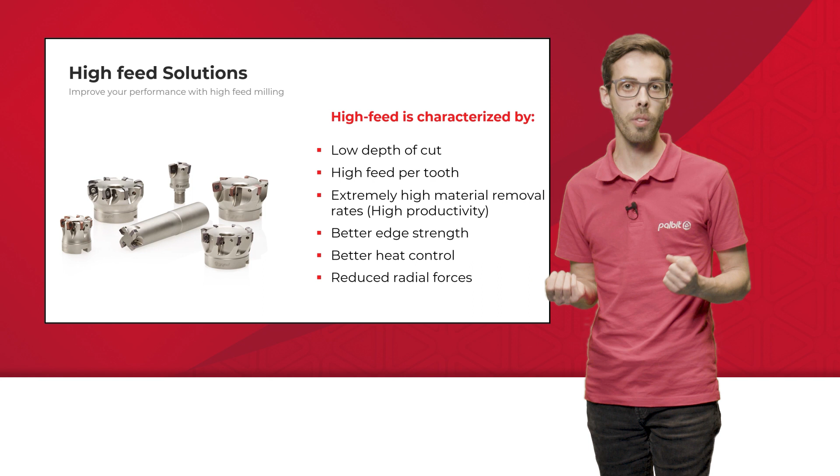High-feed milling is commonly seen in roughing operations where it can provide maximum productivity. In summary, these strategies combine a shallow depth of cut with an appropriate small entering angle, allowing a considerable increase in feed per tooth, also having as advantage a more resistant cutting edge, better temperature control, and reduction of radial forces. This strategy can be seen across a wide range of materials, especially difficult to cut materials.

Depending on the material, we must choose the most suitable chip breaker to produce the most desirable chip and extend tool life. Palbit offers a specially designed chip breaker for each material class.

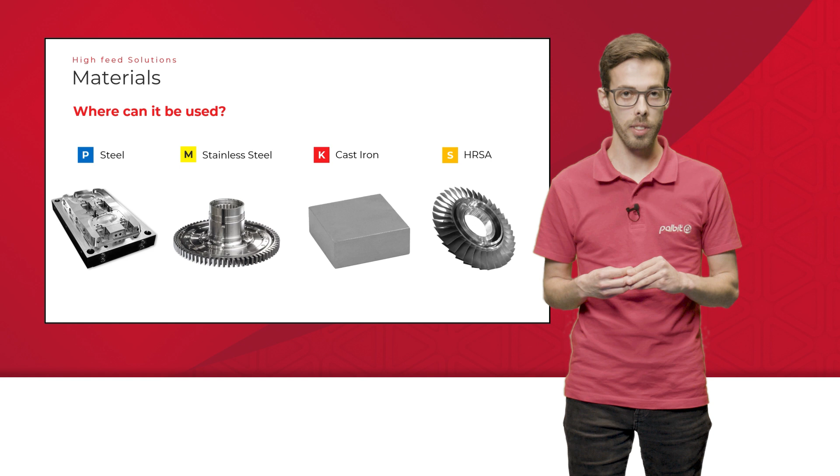Now I present to you our line of solutions for high-feed milling. We currently have 4 lines of milling cutters for high-feed milling. One of each is solid carbide. These lines are offered in Weldon, cylindrical, threaded, and arbor configurations.

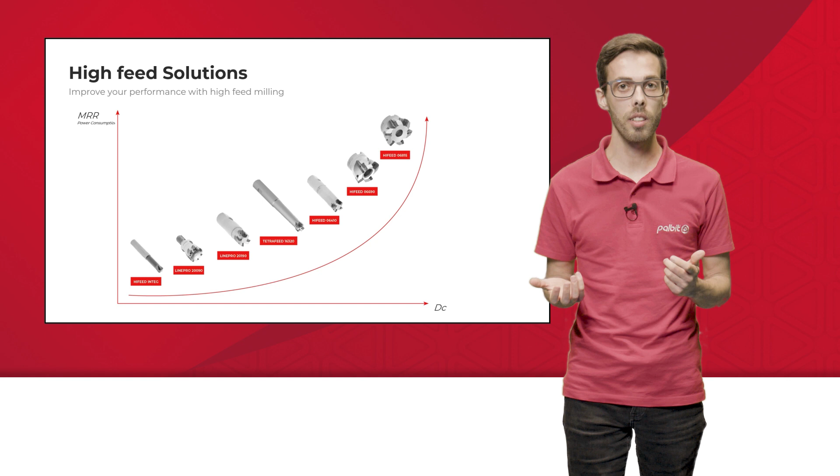In the presented graph, you can see a distribution of our product range based on material removal rate as a function of cutting diameter. Our LinePro is ideal for anyone looking for a versatile solution, especially small and medium-sized manufacturers, who, with a single product line, can carry out shoulder and high-feed milling operations, with special emphasis on our Tetra Feed line, which for identical cutting diameters of the line high-feed allows for a greater number of teeth.

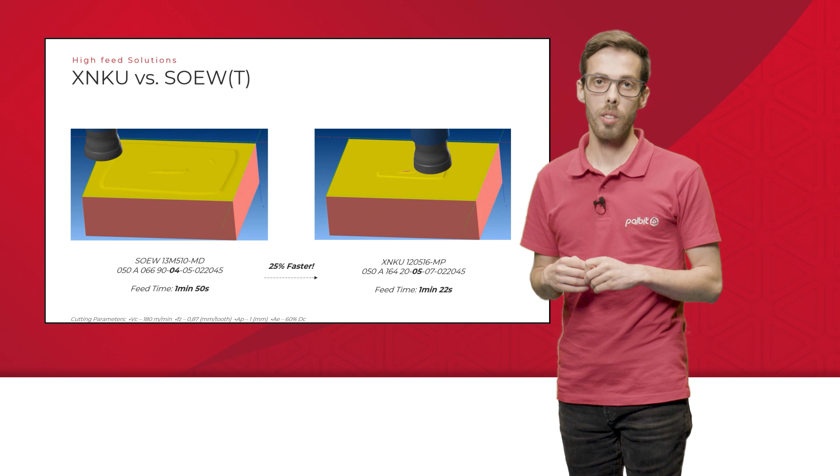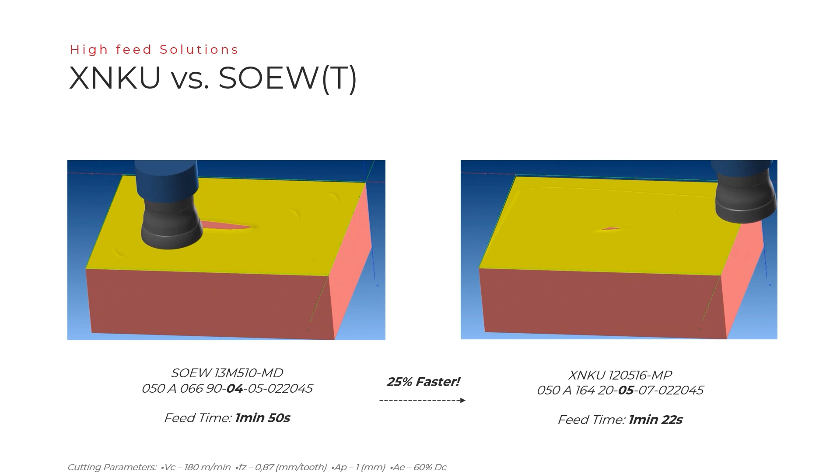As you can see, for the presented cutters, the addition of one more tooth allows us to increase our productivity by 25%. However, the negative geometry of Tetra Feed inserts requires higher power consumption. On the other hand, the positive ground geometry of SOEW and SOET inserts guarantees a superior run-out, which translates into a more stable cut with less vibration and cutting forces, while allowing us to offer a wider range of diameters.

Next, I present to you my colleague Nuno Leitão.

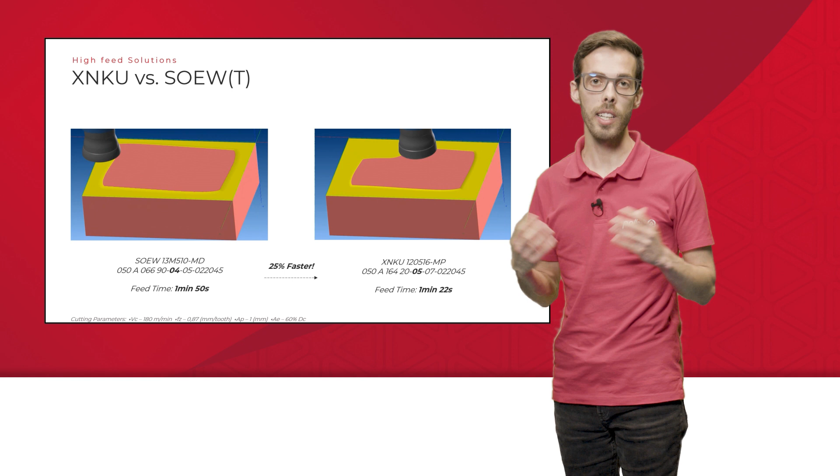Hello everyone and welcome to our webinar on high-feed milling. My name is Nuno Leitão and I'm Palbit Area Manager responsible for Italy, East Asia and Southeast Asia. My path in Palbit allowed me to contact with different markets with completely different levels of maturity, which also gave me the opportunity to see the same type of components being machined with completely different milling approaches.

Our technical team gave us a wonderful introduction about Palbit high-feed milling tools. And to complement it, I'd like to emphasize that high-feed milling is the milling concept that characterizes mature markets with good technological knowledge and qualified technicians.

However, competition is out there, and as a complete tooling provider, Palbit team challenged itself to develop a wide range of solutions capable to compete on all kinds of markets, from exotic materials to mold steel and cast irons, from the high technical requirements of aerospace industry, where even the temperature of the workpiece must be taken into consideration, to a simple pocket on a mold steel.

From high-feed special solutions to multi-application solutions provided with our lines 200, 201 and 202/90. Speaking a little bit about the market. According to the latest published data, as previously introduced, the worldwide milling market size is estimated to be over 8 billion United States dollars. From those 8 billion, about 21% are estimated to be related to high-feed milling tools. We are speaking about a market size of $1.7 billion, only for high-feed milling.

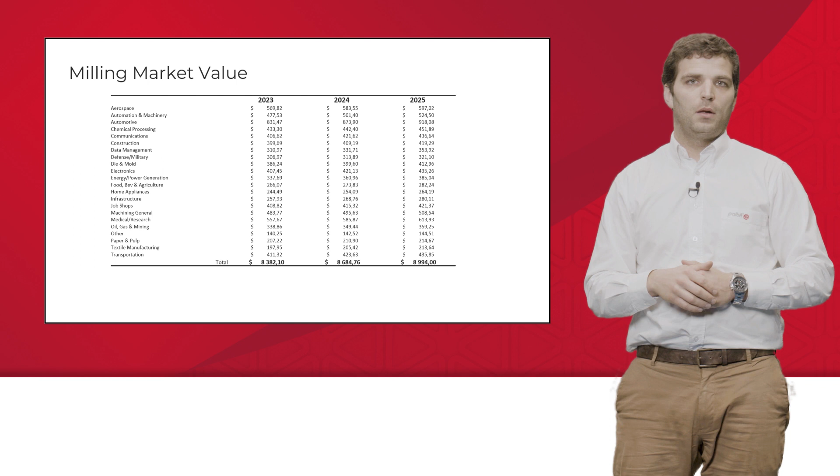We will proceed this journey taking an overview over our solutions, so that when we are in front of our end users, we clearly know the solution that better suits their needs. We will also have the opportunity to check some test reports where we can compare Palbit solutions versus our competitors. We will start with XNKU, and Palbit lines 16320 and 16420 are our latest release on high-feed indexable milling, developed with the main purpose of decreasing the tooling costs of our customers.

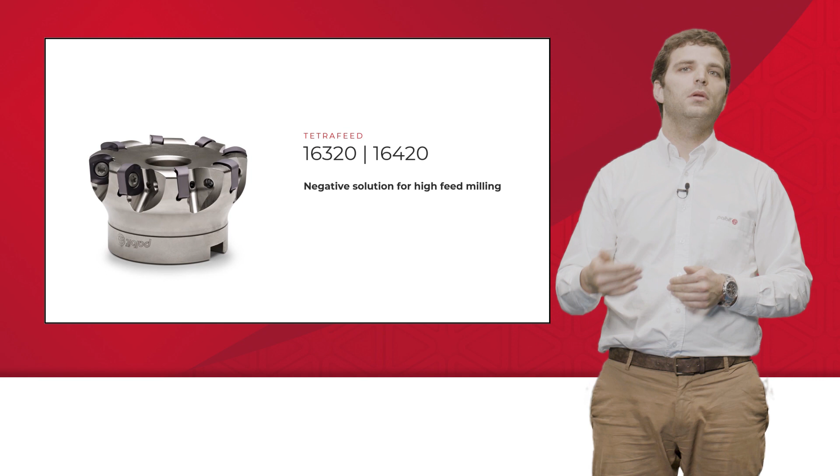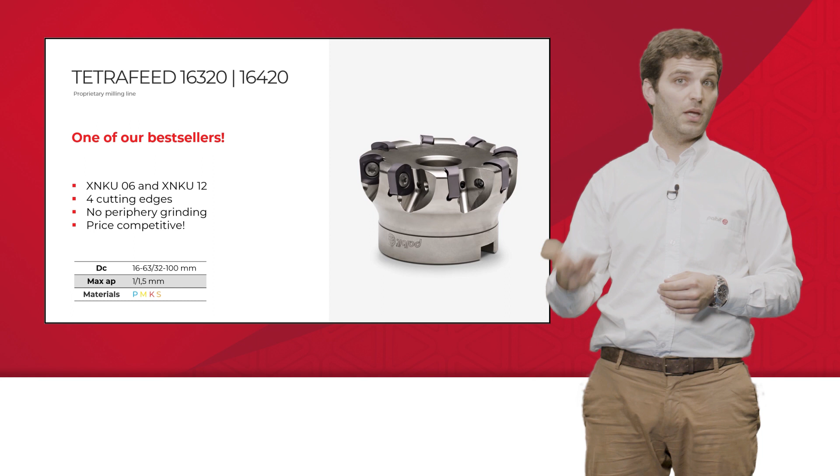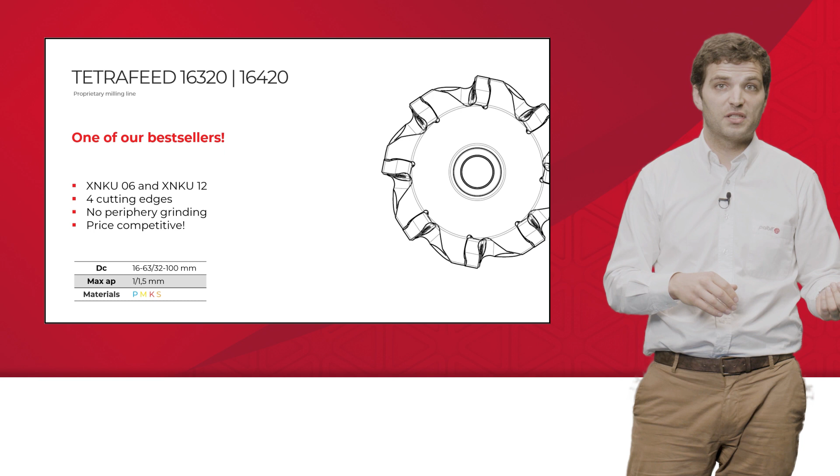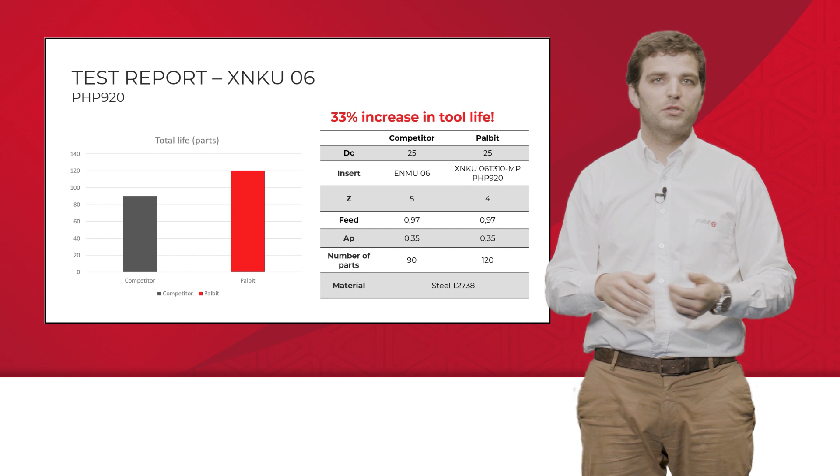XNKU is a robust negative insert, capable to work on a wide range of diameters, and with the main feature of being tangential, which allows a bigger table feed when comparing with a positive solution with the same diameter. Despite being a negative solution, XNKU delivers a smooth cutting due to the positive chip breaker and due to the curved shape of the cutting edge that allows a smooth entering into the workpiece material. XNKU does not require grinding on the periphery of the insert, which, despite the bigger radial runout, has the advantage of being more competitive price-wise. On the following screens, you'll be able to see why XNKU can enhance the cycle time and improve the tool life versus our competitors.

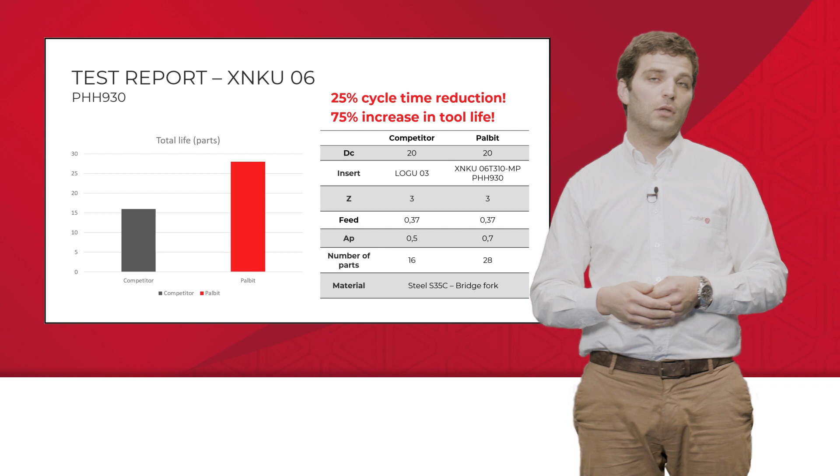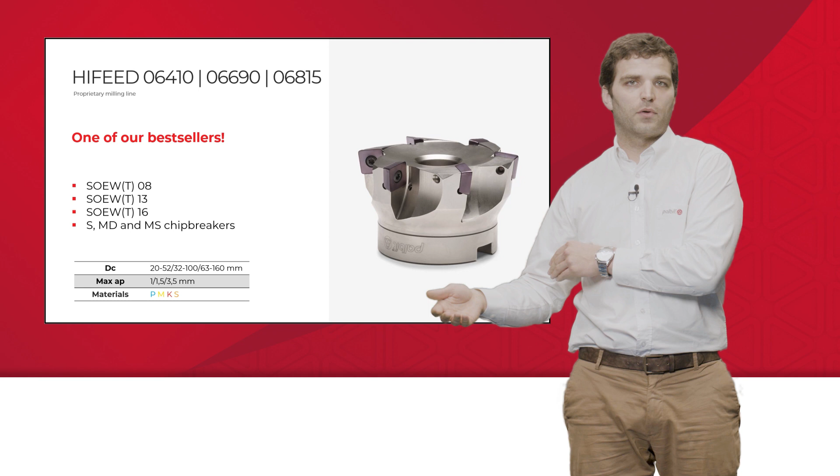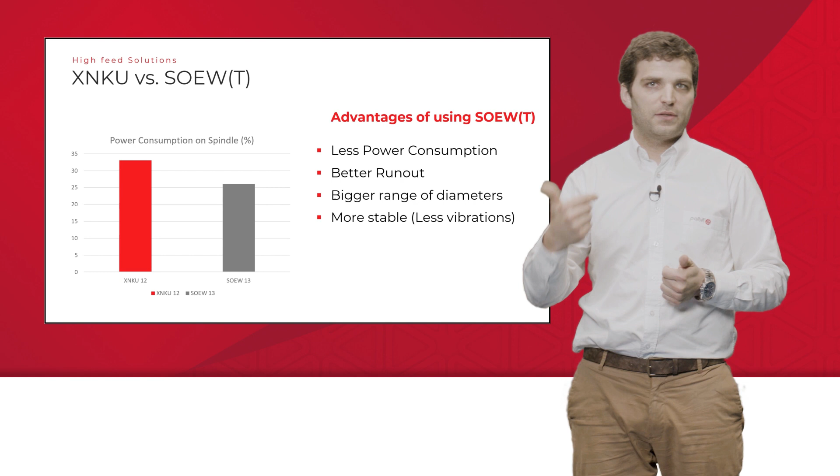The lines 064, 066, and 068 are lines with lower entering angles than 163 and 164. This feature, together with the fact of SOEW and SOET being positive inserts, completely ground, allows higher feed per tooth than XNKU, which can be beneficial in some applications. When speaking about SOET's MS chip breaker, together with our PHH 930, this is our first choice for heat-resistant superalloys and stainless steels milling with high-feed concepts. On the following screens, you'll be able to see how SOEW or SOET outperforms our competitors.

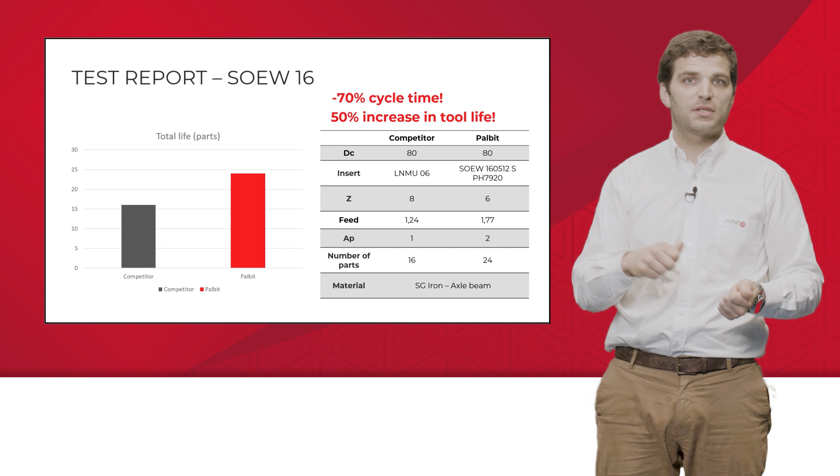Line 20090 and 20190. When our customers are a small workshop, rather than looking for productivity, most of the time our customers are looking for versatile solutions with low tooling costs. But why not offer them a versatile solution that can also be productive? With the lines 20090 and 20190 that are tailored for shoulder milling and finishing, we give our customers the opportunity to assemble on the same milling body shoulder milling inserts, finishing inserts, and high feed milling inserts.

So now that we have gone over all the main high feed milling lines, you should be wondering to yourself, it will be perfect if I can use this kind of machining strategy on small diameters, as I will be saving a lot of time for my customers. However, we are limited to 10 millimeters with the line 20090 with XPET 06, and you are correct when you wonder that. There is a limitation on diameter. However, I have good news. Palbit has a solution for you with our HIFEED-INTEG.

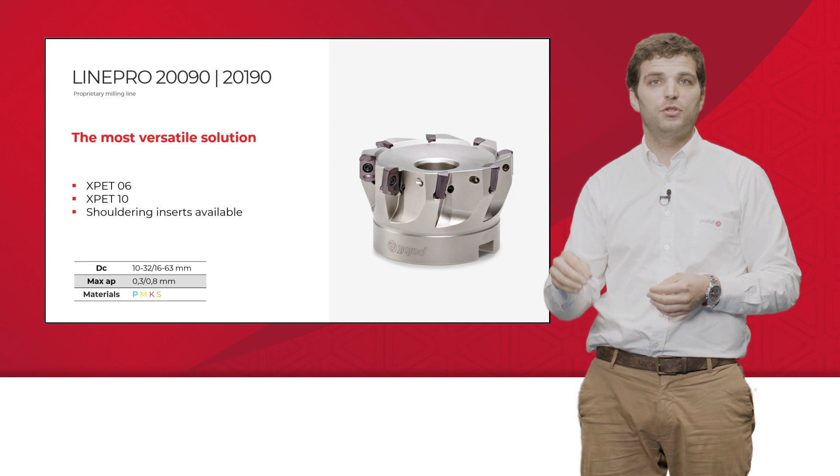With HIFEED-INTEG, we are able to implement all the mentioned benefits of the high feed milling concept on solid carbide end mills. Beginning with 6 millimeters of cutting diameter, produced with a tailored grade, a strong core, reinforced cutting edge, and optimized flute shape to improve the chip evacuation, HIFEED-INTEG allows to achieve a tool life up to 30% higher when compared to a typical solid carbide end mill, even when processing hard materials. We recommend HIFEED-INTEG on small, deep, and shallow workpiece features, on small 3D shapes, roughing, and on small components where plunging is required.

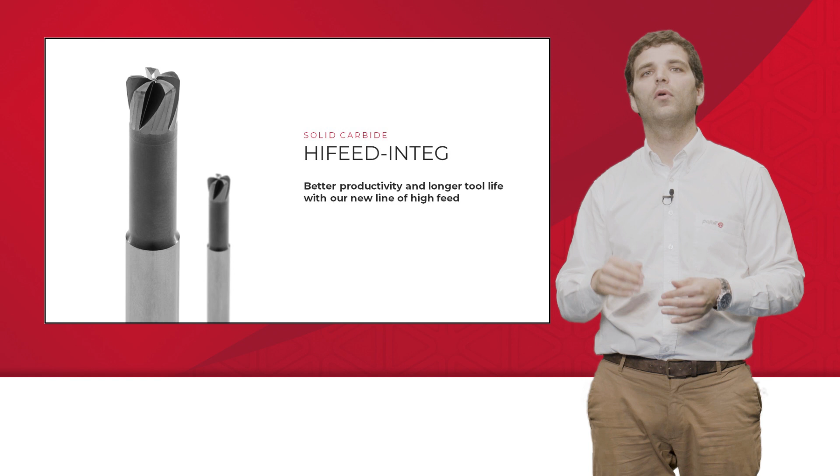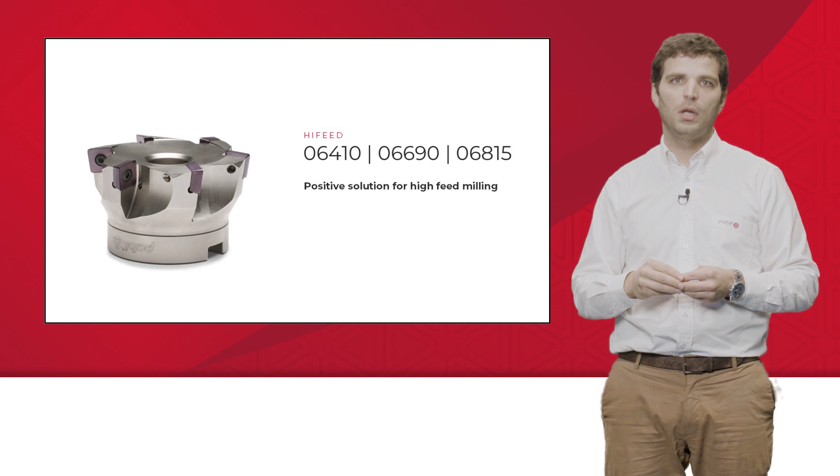Let's now make a summary of everything that we have learned today. The high feed market accounts for over 20% of the milling market size. For small components, we should use HIFEED-INTEG, HXR. When we have strong machines and we look for price-quality ratio, we use XNKU. For high performance, lower cutting forces and better runouts, we use SOEW and SOET. For versatility, we use XPETs.

Wow! Thank you, Nuno and João. Great job! Interesting and insightful as always.

Now, we will explore an industry sector that is becoming more and more relevant due to the rising energy and fuel prices. As a viable alternative to the individual transportation, the railway has historically played a significant role transporting people and goods. It is now gathering attention and investment from decision makers as a sustainable and efficient alternative to cars. Let's explore this sector with the help of Rui Ribeiro. Rui, the stage is yours.

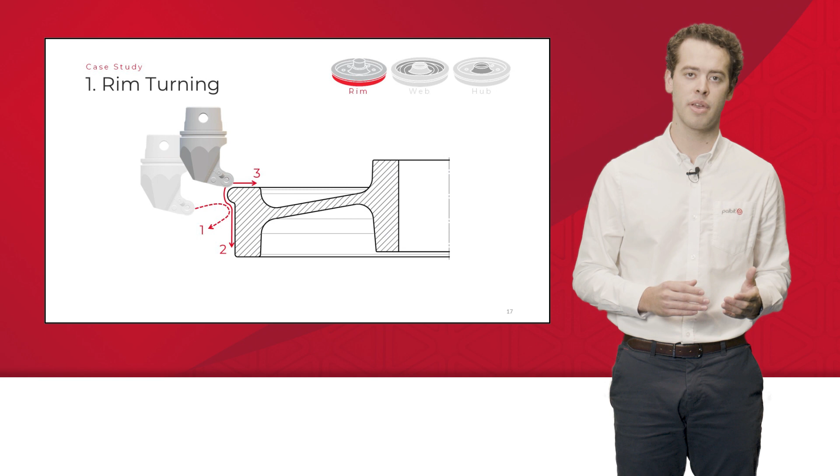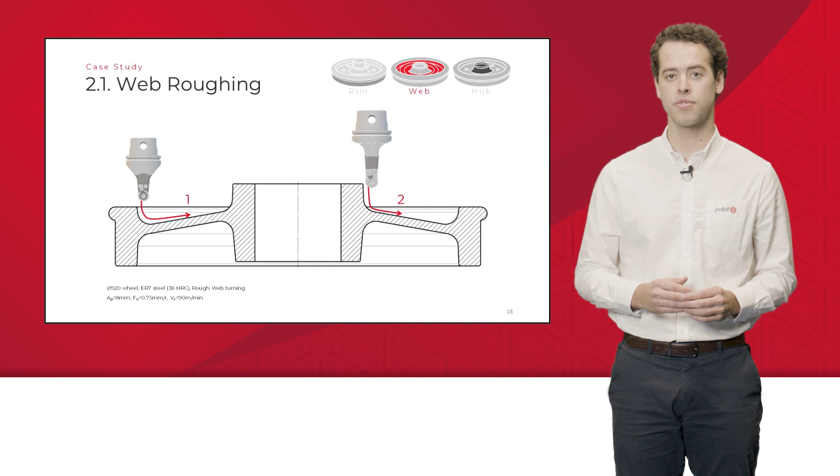The second part is the web. It is the area between our rim and the hub. It is the largest area where the most material is removed. And our main challenge is finding the right compromise between tool life and insert toughness, because our tools need to withstand severe vibrations throughout the process, particularly in problematic areas, including the corner radius between the web and the rim, and the corner radius between the web and the hub. In this spot, our insert will remove the most material with the widest contact surface and withstand the highest loads. Here, we suggest reducing feed rate by 1/3, and often inserts with ISO range P15 to P25 grades are preferred.

Last, we have the hub. It is where the rail axle is installed. Often, it requires multiple passes from roughing to finishing, and the main challenge is the limited cutting speed. This is due to the smaller cutting diameters found, often leading to long chips being formed.

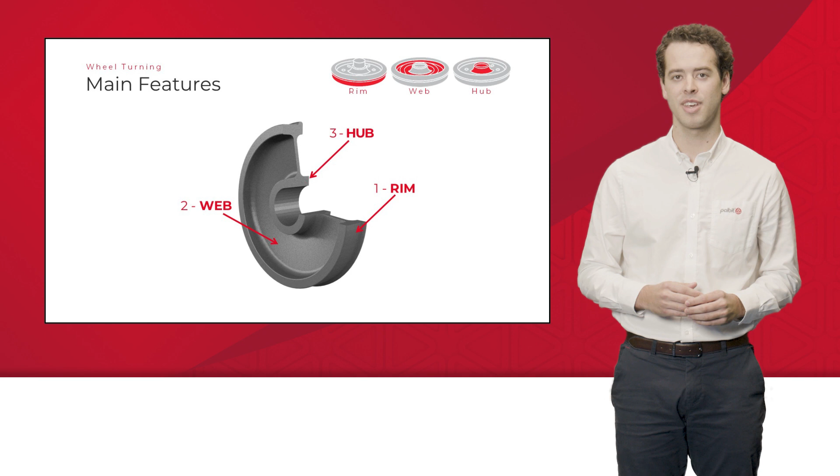For all these operations, Palbit presents itself as the first choice tooling partner for you. For rim and web turning operations, mainly round inserts are used, which you will find available in the Palbit range from size 25 to size 32, in a comprehensive combination of geometries and grades suitable from roughing to heavy roughing operations, from a depth of cut of 3 mm to 18 mm. When it comes to hub turning operations, not only round inserts are applied in OD turning and face turning, but also square shape and C-shape inserts are applied, particularly on internal diameter turning. Again, Palbit offers a wide variety of solutions covering wheel manufacturers' needs.

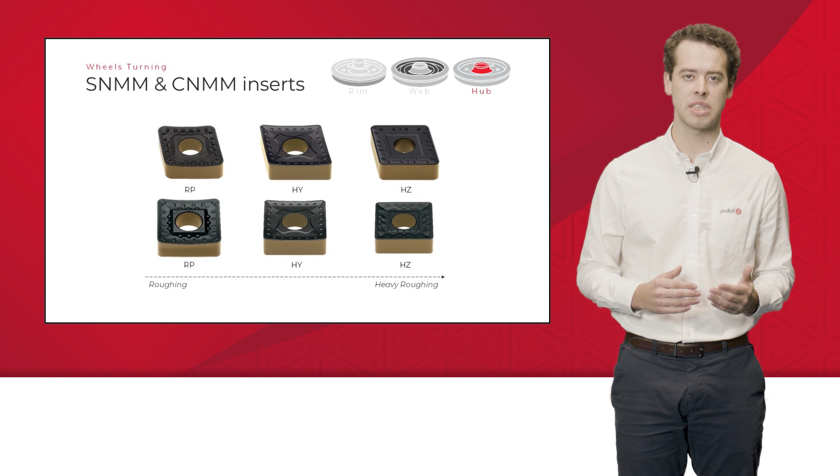In addition to standard and catalog items, a big advantage Palbit offers is the capacity to attend individual customer needs and offer tailor-made solutions to them. An example is that for all these operations we have spoken about, Palbit is able to provide and support manufacturers worldwide with tailor-made tool holders according to their specific requirements. Do you have a requirement like this? Contact us with the required machining connection and general dimensions. We will design it for you.

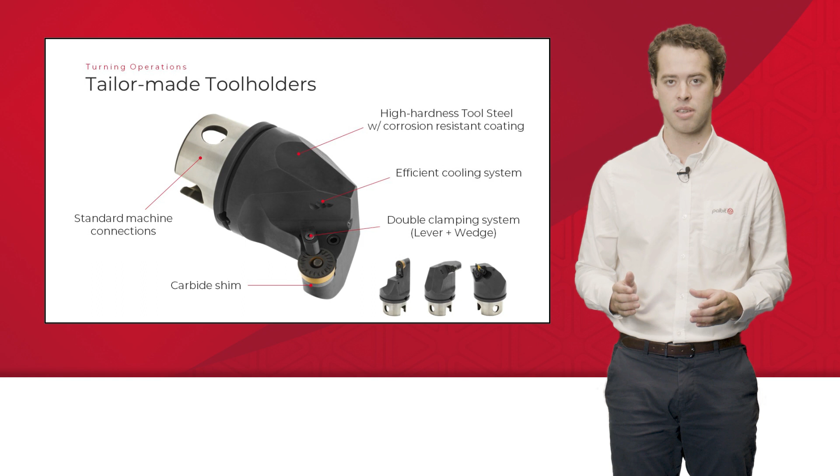Palbit's commitment with its customers is to ensure the supply of high quality and reliable tools, together with productivity and cost-saving advantages. Throughout this session, we will be presenting multiple success cases which we look forward to replicating with your help.

Particularly on wheel turning, we would like to share with you a recent implementation on web roughing where Palbit replaced a reference competitor with over 50% tool life gains for our customer. In addition to tool cost savings, the customer was able to reduce tool setup and changing time by 1/3. We can confirm the customer was quite happy.

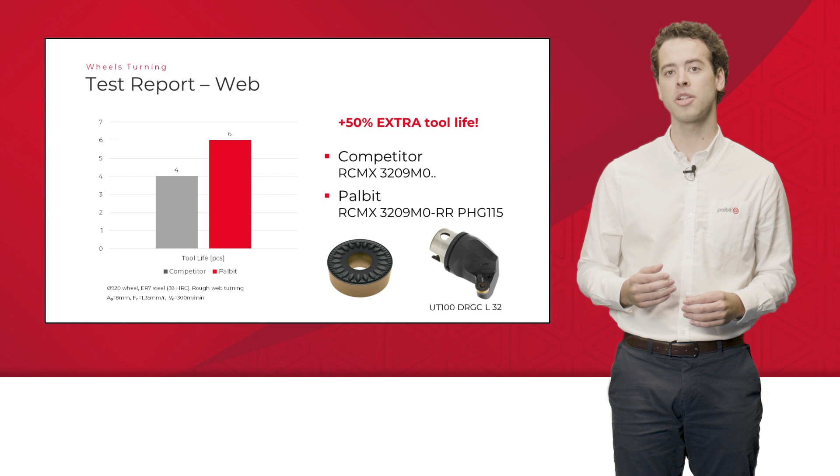With time adding up and trains continuously running on the tracks, rail wheels are worn out and deformed. This requires maintenance works, including rail wheel reconditioning. Reconditioning works are mainly focused on the contact surface with the rails, where flat spots, flange deformation, or even cracks can appear and need to be removed.

Usually, LNUX-shaped inserts are used for this job, and as always, Palbit offers the right tools for manufacturers' needs. In Palbit's range, you can find a wide variety of LNUX inserts available, from normal to tangential mounted versions, suitable from medium to roughing and even heavy roughing operations, with depths of cut ranging from 1.5 mm to 18 mm. Selecting the right tool depends not only on the wheel material, but also on how damaged our wheels are.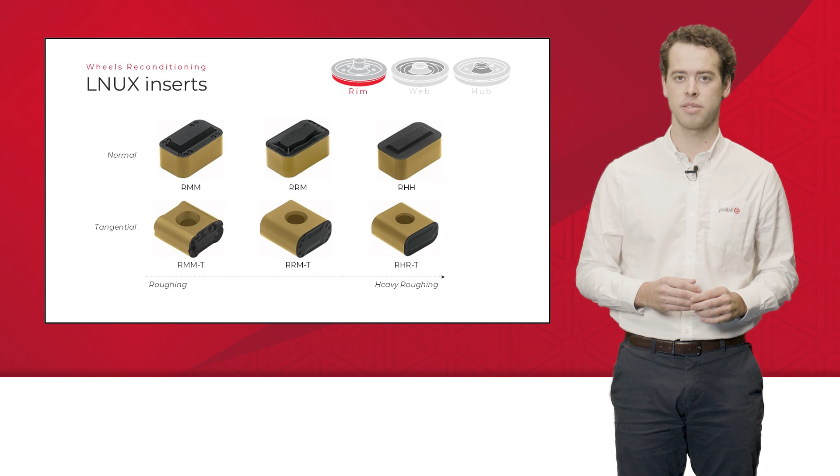We are now sharing with you another example of Palbit cutting tools implementation over a reference competitor. This time, our job was focused on rail wheel reconditioning. On a 900 mm wheel, we were forced to machine it with a depth of cut up to 3 mm. Palbit managed to prove its performance at par with the competition and provide significant gains to this customer.

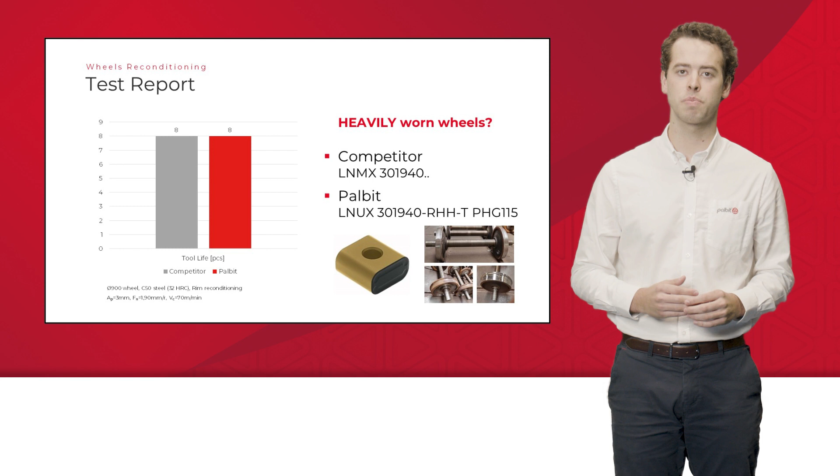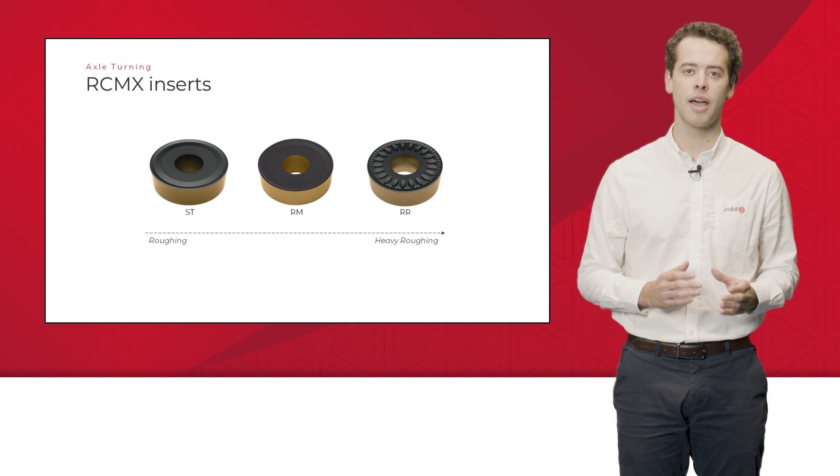Another important role Palbit tools play in the railway industry is in the axle manufacturing process. Axles are produced from large steel bars which are forged to a blank shape, usually in the surroundings of steel manufacturing plants. From this stage, blanks are then machined to the axles' final shape, starting from heavy roughing operations to finishing operations. As forged blanks often present a thick and hard oxide layer on the surface, we have a serious challenge in the roughing operations. You can count on Palbit to help you select the right tools for each step of this process.

The example we are showing you today is a special project we have developed for a machining company working on the first operations right after blanks are forged. Here, Palbit was challenged to come up with a solution to remove a stock of approximately 15 mm in one single pass, despite the thick oxide layers and blank dimensional variations. Palbit was able to attend to customer needs. We have developed tangential mounted LNUX inserts with an extraordinary size of 38. Again, Palbit managed to fulfill customer expectations and add value to its production processes.

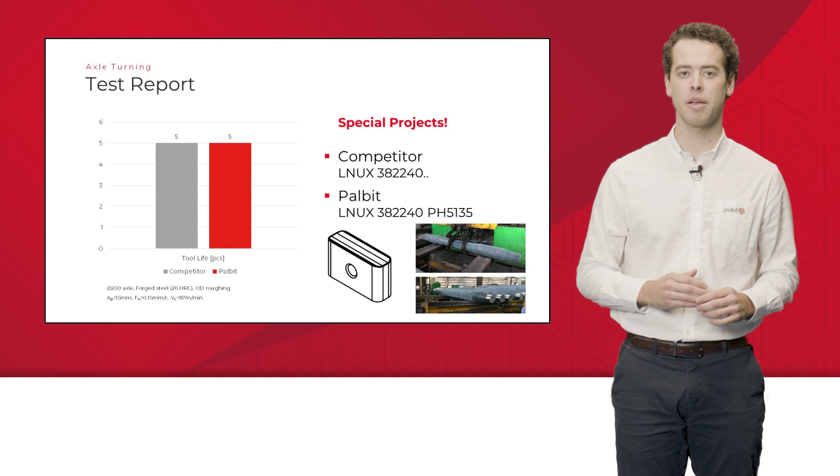Last but not least, you will find at Palbit the right tooling solutions for bogie machining processes. Bogies are essentially structures in trains connecting the rail wheels to rail coaches or wagons. Despite the high industry requirements, you will find bogie machining operations to be transversal to multiple industries where Palbit has consolidated experience and a wide range of solutions to offer. Such operations may include, for example, face milling, high feed milling, shoulder milling, or even large diameter drilling. Regardless of the challenge you have ahead of you, know that Palbit has the right solutions for you.